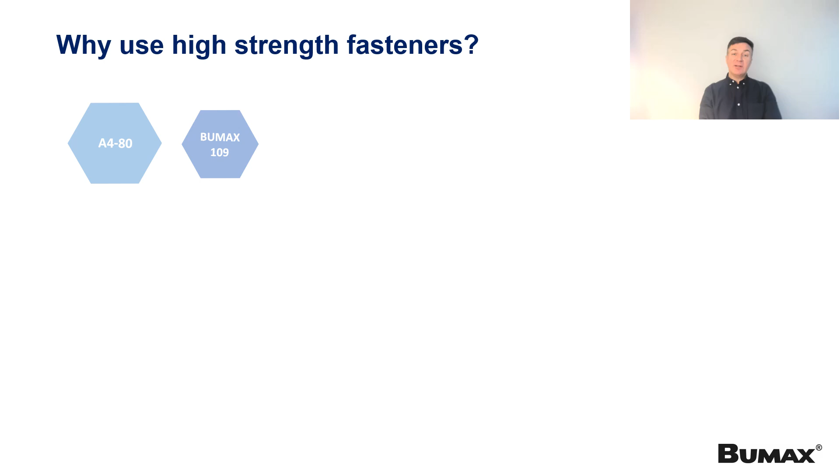There are a number of advantages to using higher strength fasteners. Firstly, it offers the ability to downsize fastener diameters, so not only reducing the size and weight of the fasteners themselves, but also allowing you to downsize the complete assembly or piece of equipment. You could benefit from an increase in material strength and capacity, providing an additional margin of safety and security.

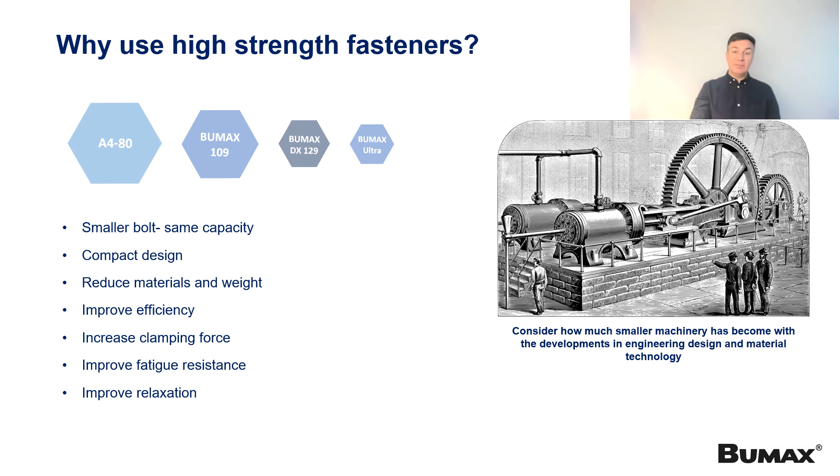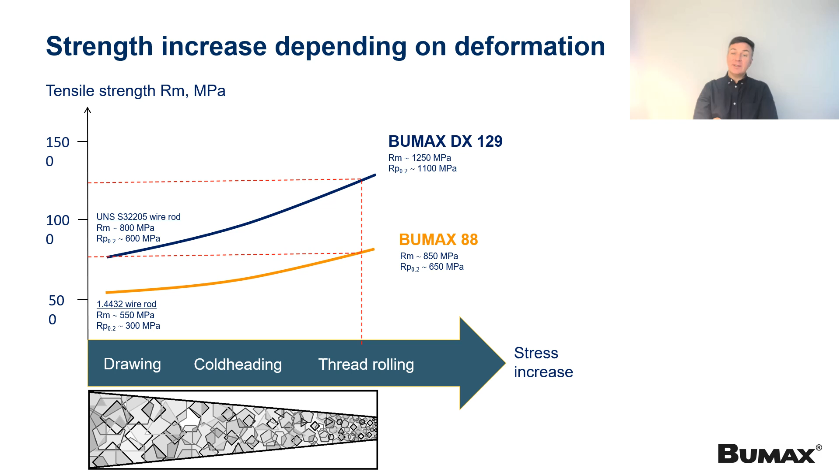Bumax achieves the strength increase through cold working the material. As the material is stretched and deformed, it builds up internal stresses in the material by rearranging the grain structure. Manufacturing processes that deform the material include wire drawing to reduce the diameter, cold heading to form the fastener itself, and finally thread rolling to press the threads into the material. All these are vital steps in building the strength of the material.

Tensile testing is conducted on every batch manufactured at Bumax. It helps to determine the yield strength and tensile strength of the fasteners. Full-size bolts are placed into an adapter in a hydraulic test rig. The fastener is subjected to an increasing load, which stretches the fastener.

The fastener reaches the yield point of the material. This is the point at which a load that is applied will stretch the material. Once the load is released, the material will revert back to its original size. The load below yield point is known as the elastic range, very much like a rubber band.

However, when the fastener is loaded beyond yield, any stretch of the material will be permanent and will not return to its original length. This is known as plastic deformation. As you continue to load the fastener, the material will stretch plastically right up to the point at which a fracture or failure will occur. This is known as the tensile strength.

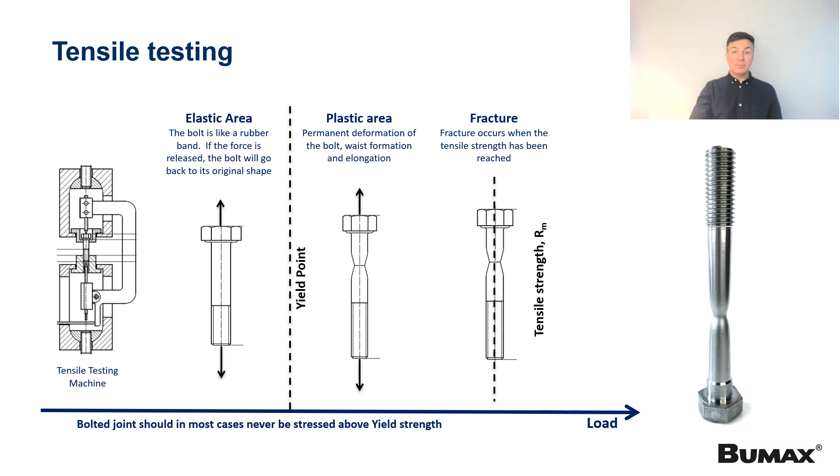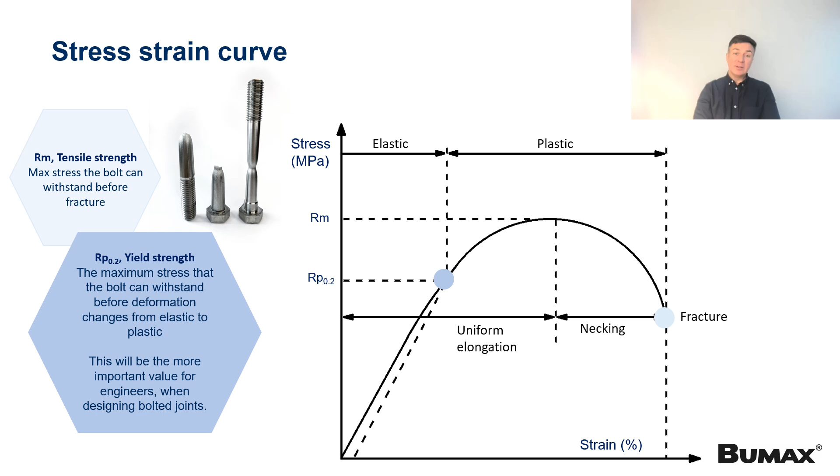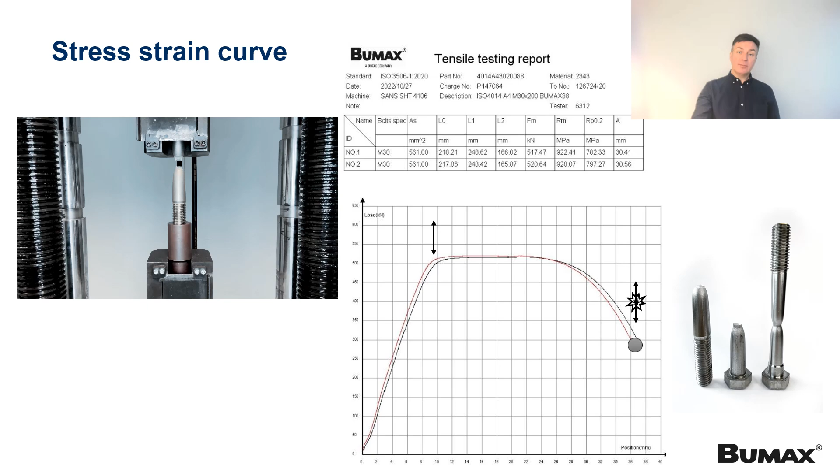Ductility is the material's ability to undergo plastic deformation before fracture. Think of steel as similar to plasticine. Ductility is a measure of how stretchy the material is. Ductility is important because this gives bolts a margin of safety before they fail.

If a bolt is overloaded, then there will be an indication of the bolt permanently stretching. This gives time to resolve the issue during partial failure before the bolt becomes dangerous and breaks. One of the advantages of Bumax fasteners is how much more ductile they are compared to other generic stainless steel fasteners on the market today.

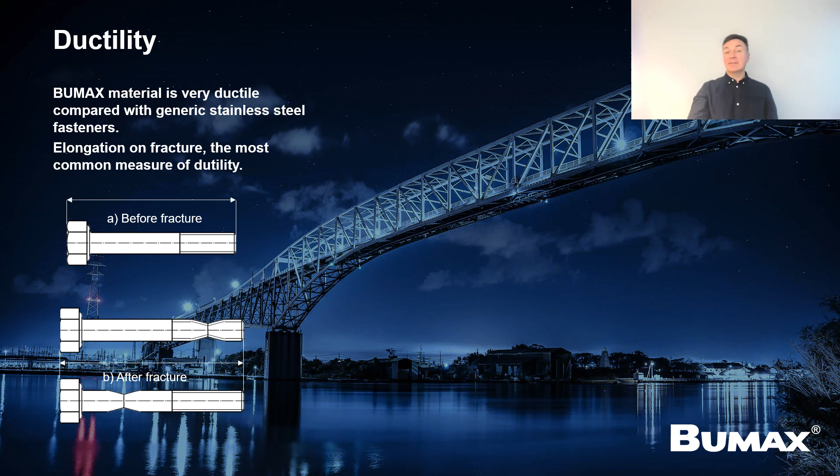Fatigue occurs when a material is subjected to repeated loading and unloading, otherwise known as cyclic loading. Repeated stress may be more demanding, even though less than the yield strength. Microscopic cracks can form at areas of stress concentration such as surface defects, inclusions, slag. Bumax fasteners are excellent due to their very high material quality and mechanical properties from strain hardening.

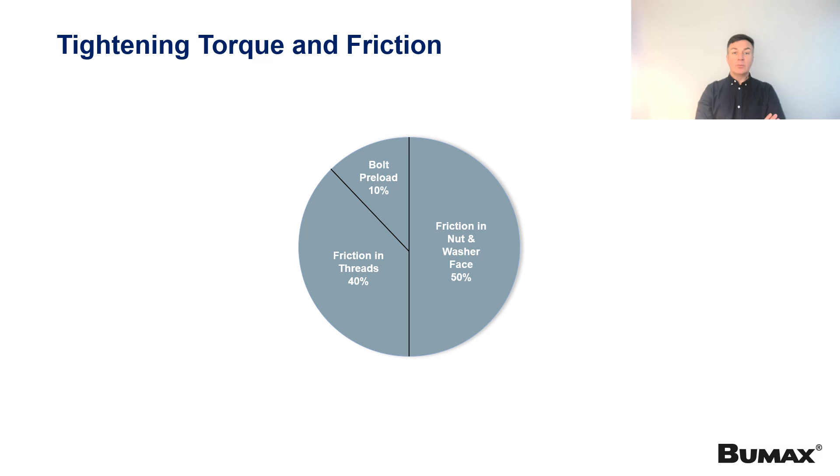Tightening torque, preload, and friction have an important relationship. Together they determine how well a bolted joint connection will stay together. When applying a tightening torque, only a small proportion of this torque will go into stressing the bolt. Around 80 to 90% of this torque will go into overcoming the friction due to the roughness of the surface: friction under the bolt head or nut, and also friction in the threads.

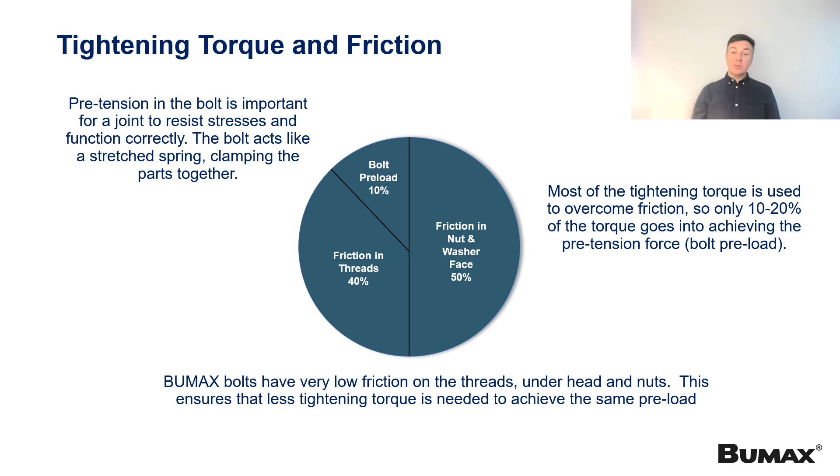With many fasteners, the friction coefficient, or how rough the surface is, can vary a lot. So when you tighten the bolt, you can get a lot of variation, which means that the actual bolt preload could be very different even though you are applying the same torque level. This is very important as you could risk too low preload, which can lead to loosening, or you could end up with too high preload and risk overstressing the bolt.

Bumax bolts benefit from a very consistent level of friction at 0.14. This gives designers some reassurance that the applied installation torque will result in reliable joint clamp forces. Also, because of the consistency of Bumax bolts, this can be a big advantage in serial production of premium products, where it is important to maintain the same parameters and product quality and reliability.

The two graphs below show the advantage of Bumax 88 bolts over standard A4-80 bolts, and the importance of ensuring a low and consistent friction in the bolts when it comes to the installation and reliability of the assembly.

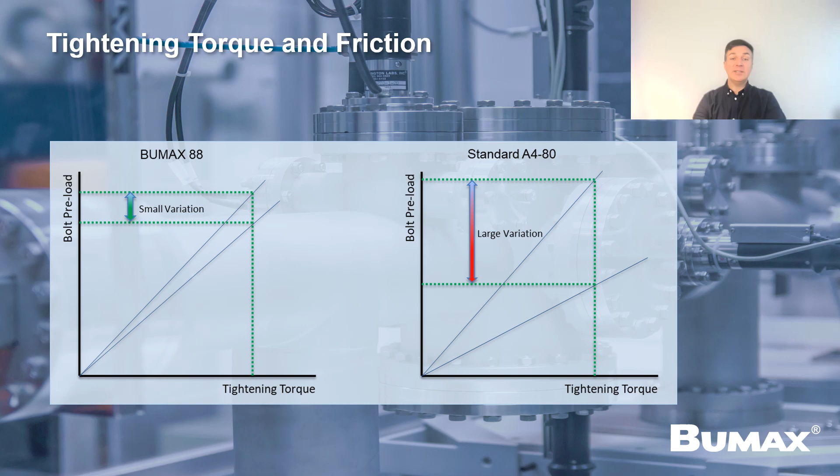Galling is a phenomenon common in stainless steel materials. When two stainless steel surfaces are forced together and slide against each other, the chromium oxide layer breaks down and the rough surfaces tend to act like plasticine, essentially tearing against each other. This is what happens when torquing up standard stainless steel fasteners. The pressure between the thread surfaces on installation can cause galling and seizing. Galling also prevents tightening torque from translating into bolt preload.

Bumax fasteners have a low risk of galling for several reasons. Firstly, the quality of our material ensures fewer impurities in the steel. The rolled threads offer a much better surface finish and higher hardness. The consistency of the threads means a better tolerance and fit.

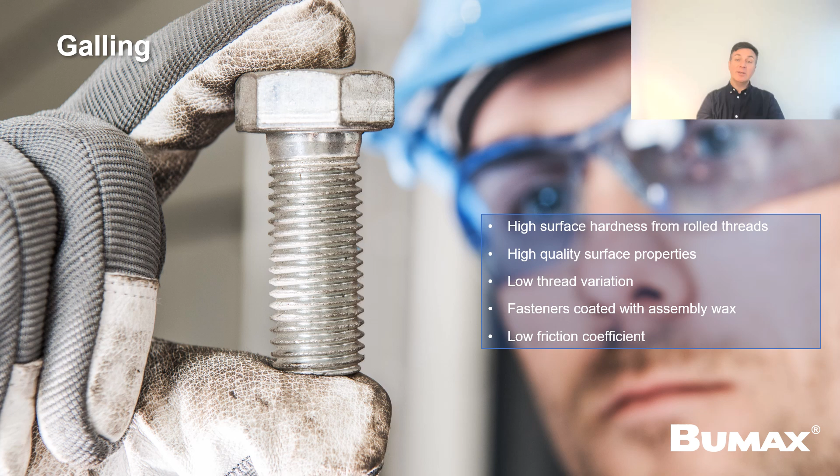Finally, Bumax bolts come pre-waxed. This is a specific wax that is applied during production. It leaves a thin, dry film that is designed to keep friction low and consistent during installation and helps prevent the risk of galling. Many customers in critical industry sectors choose Bumax purely due to its anti-galling performance.

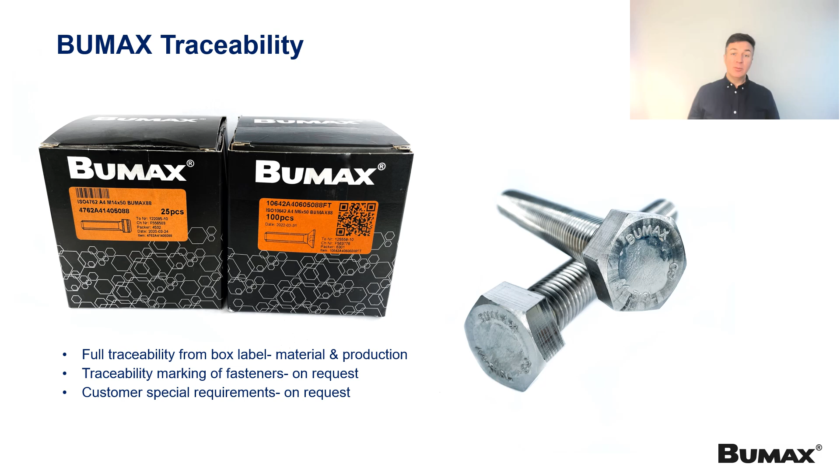All Bumax products are fully traceable down to the individual box label, with reference numbers for both material and production. Bumax is also able to offer individual traceability marking on fasteners.

Every Bumax product manufactured can be supplied with a 3.1 product test certificate according to ISO standard 3506-1. Test data is held on all Bumax production and retained for a minimum of 15 years. 3.2 third-party witness certification can be provided upon request. We are also able to offer additional customer-specific testing.

Bumax 3.1 certificates contain the following information: a unique certificate number, material reference number and chemical composition, mechanical test data including tensile strength, yield strength and elongation at fracture, as well as dimensional confirmation. Bumax 3.1 certificates can all be cross-referenced to the Bumax box label.